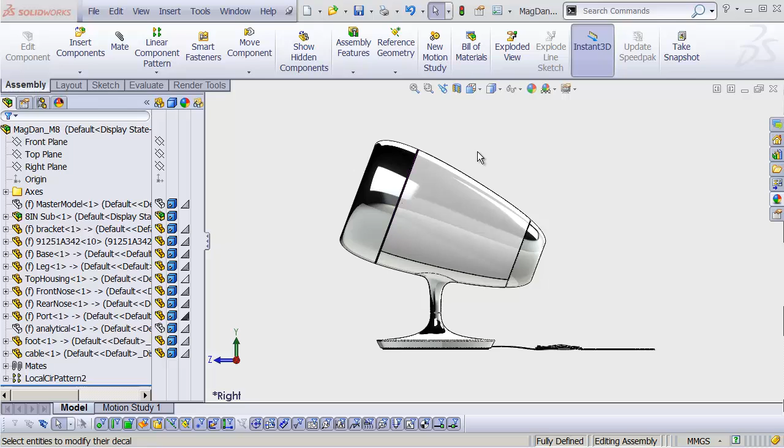But all I want to do to finish this up today is just add that one last little bit of graphic detail to bring this to that final level of polish. So let's head here and actually turn off our lines in the viewport. So we're just left with a hidden line mode. And this guy is still purple, so I'm going to right-click that, go up to its appearances, and let's delete that purple from the body, and instead add it to the entire bracket part.

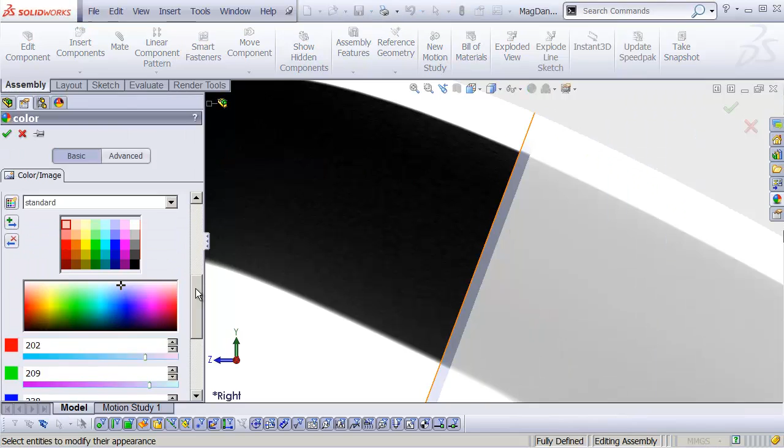And we're going to change it, instead of purple, let's make it a nice hot orange color, near red, something like that. That looks pretty good. And I'll use my Advanced tab, go to my Illumination Properties, and I'll actually set my specular color to orange as well, which should heat this up a little bit, and turn on Blurry Reflections just to make that a little bit easier to see there. Hit OK. That's looking pretty much the way that we intended.

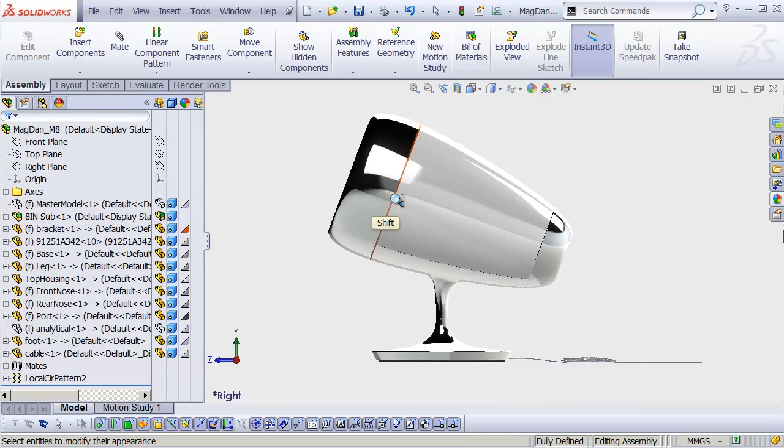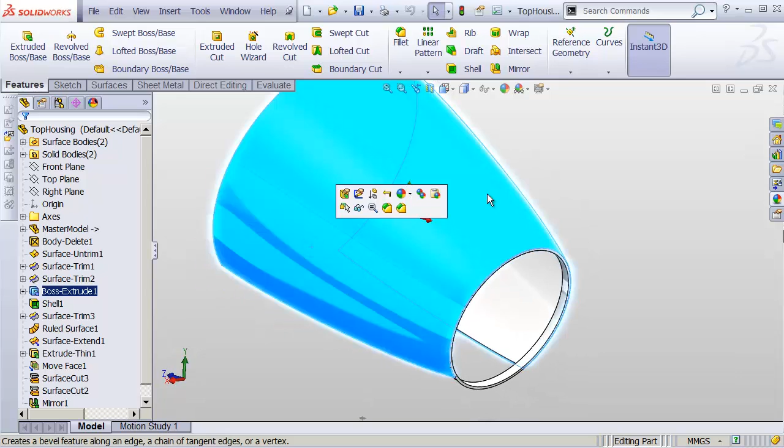And then there's one last detail, and that is there's an M8 graphic that needs to be kind of screened onto the side of this thing. And when I screen it on, it needs to be on this side, but not the other side. Or more correctly, we might want to put it on both sides, but it would be mirrored on both sides. Let's open up this part in its own window. And in order to make it so that it only appears on one side and not the other, we're going to need to split this face in two.

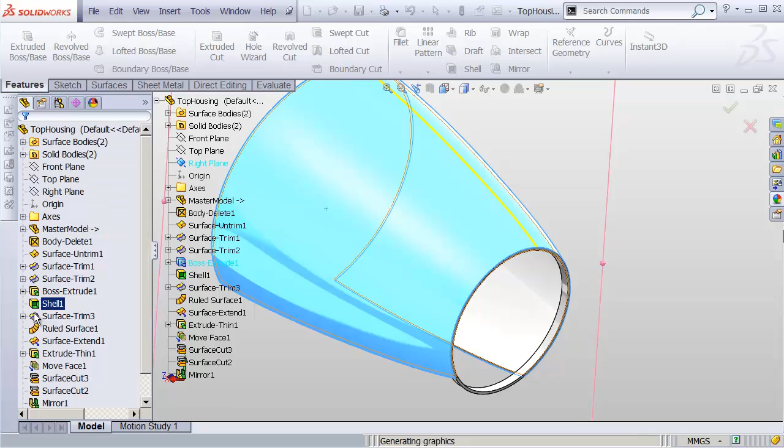So let's head up to our Curves drop-down in the Features tab, and we're going to add a split line. Now this is going to be an intersection split line. We'll choose basically the intersection tool. That'll be the right plane. And then we'll choose which faces we want to split. And that'll be this outer face here. Hit OK. And now we actually have two separate faces, one on each side.

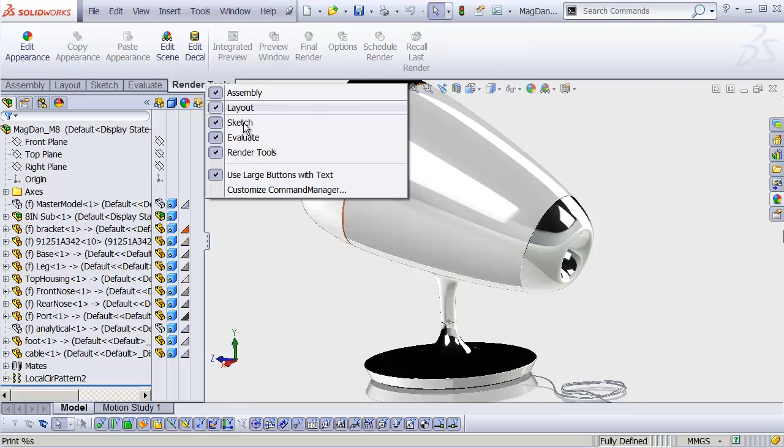It makes no difference in our geometry whatsoever. It just gives us something to select on each side separately. So when we're applying our decal, it'll be separate on each side. Let's close that up, save it. And then back here, in our Render Tools tab, this is one that we've not used yet. If you right-click any tab, you can always show the Render Tools tab, and underneath it there is an Edit Decal button. And in that, the first thing I'll do is select an image.

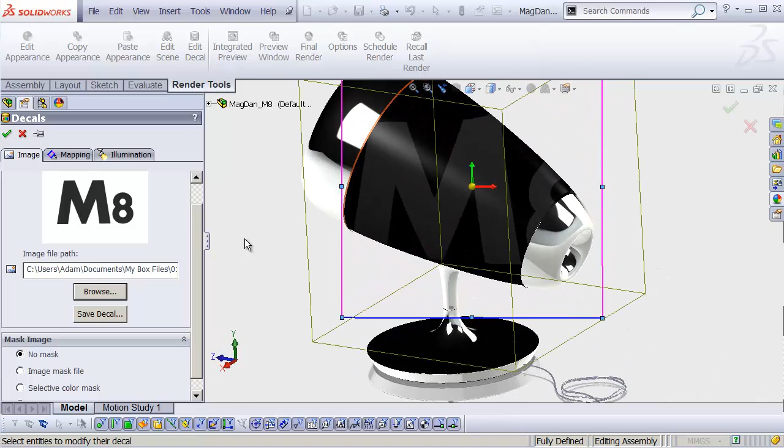So let's hit Browse. And I've added a PNG file, an M8 PNG logo file. Let's open that up and then click the face we want to add it to. And by default, it's going to have a black background the same way that it did before. So let's turn this to Use Decal Image Alpha Mask. And under Mapping, let's make sure that it's not on that entire housing.

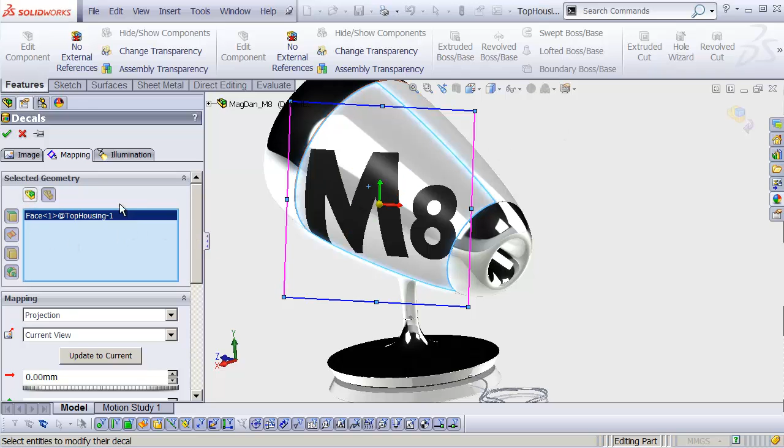Let's clear that selection. We're going to put this at the part level and then only put it on a single face. Let's choose this face, and that way it doesn't end up on the other face. We're not adding it at the assembly level, where it would have to go through everything. We're going to add it at the part level. Also, we can drag this around to move it by default, and that looks pretty good. But we obviously need to rotate this and scale it and stuff.

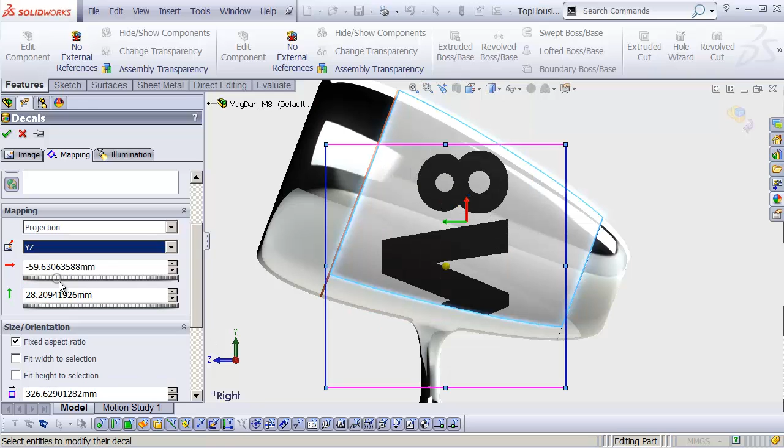So first of all, let's go over here to our projection type. It's currently set to current view. Let's set that to the YZ plane. As you can see in the bottom right of my viewport, Y and Z are what are currently visible. So let's use that, Y and Z, perfect. And then down below, we can rotate by dragging this around until we get it oriented the proper direction.

We can also scale it, and by default it's going to constrain those proportions, so we don't have to worry about those getting off. You can drag either the horizontal or the vertical dimension. It'll do the same exact thing. Then we can just tweak this into place. Now you can do this with geometry to kind of lock things down a little bit more, but in our case that really isn't going to matter at all.

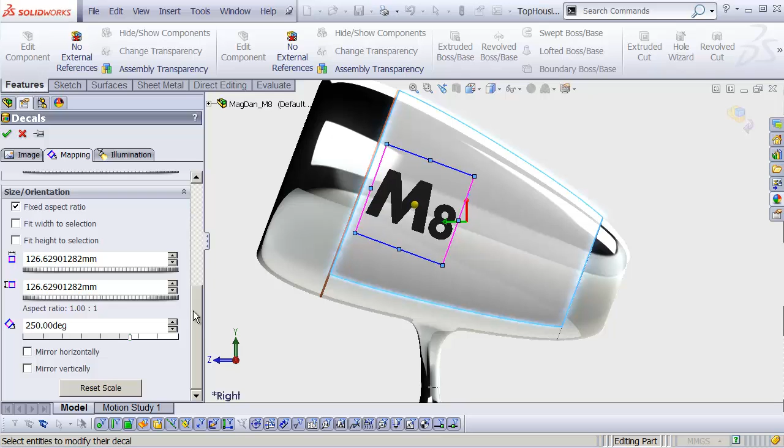Now we can click OK to exit that tool, and we're left with a finished product with a graphic on the side of it. Obviously, you could add that graphic to the other side. You can add other graphics, different things you might want to. But this is pretty much ready to render as it is.